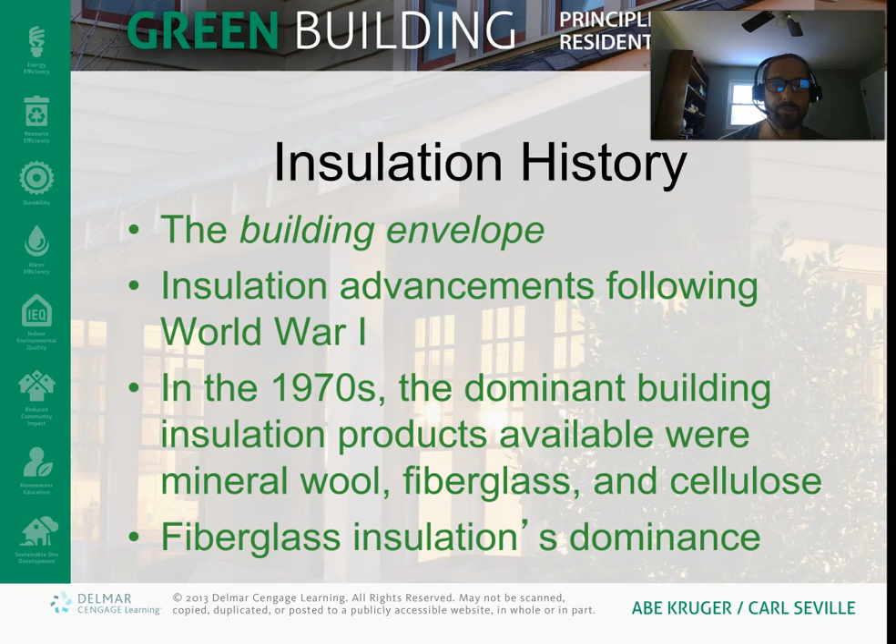Older homes are going to have primarily fiberglass batt, and a lot of modern homes as well. It's really inexpensive and easy to install. But increasingly, spray foam is being used, especially for high efficiency buildings, because it's good for air sealing and for insulation. So they're headed in that direction for high performance buildings.

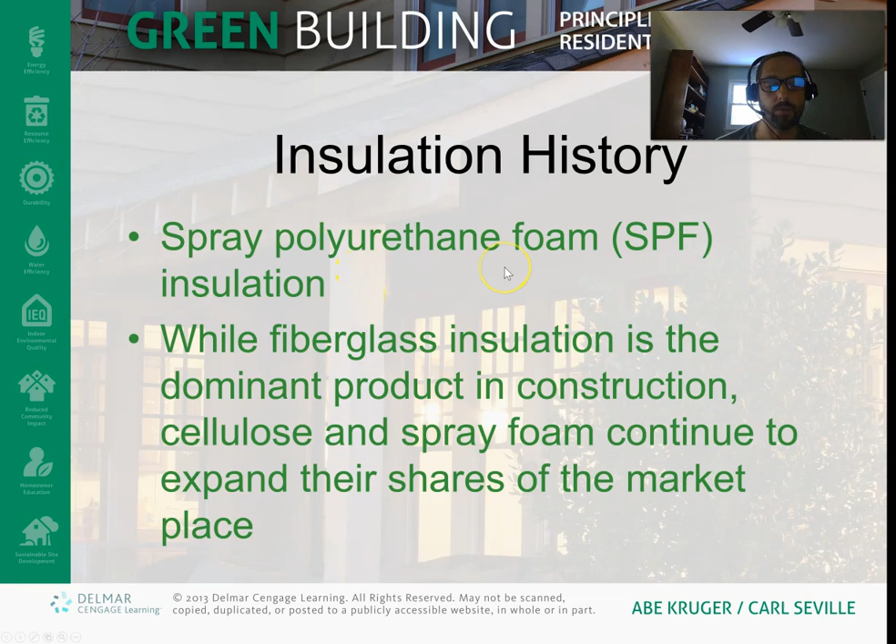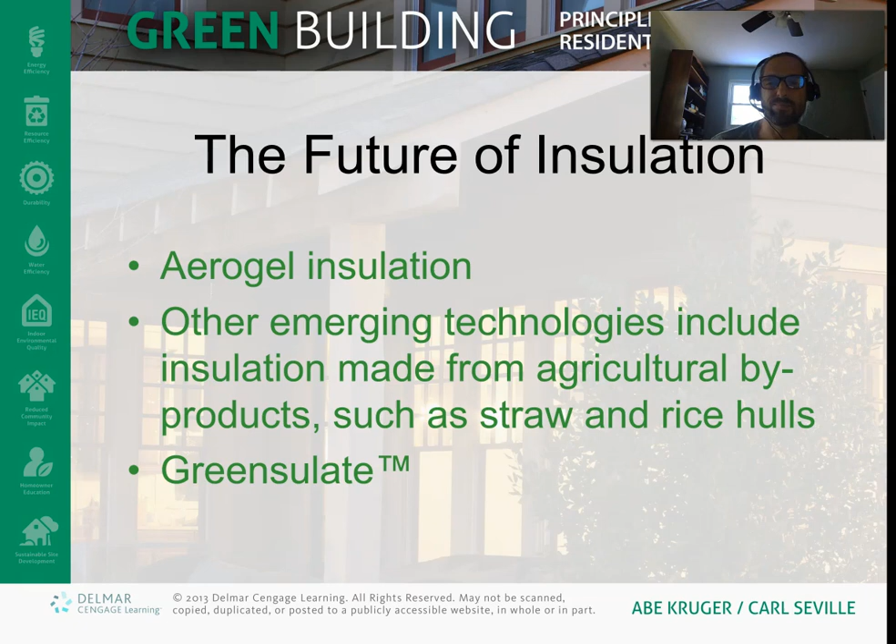There's emerging technologies in the building construction field, like structural insulated panels, which are relatively new, and aerogel insulation. So this is something that is always evolving.

When you decide which type of insulation to use, you want to think about its performance, so basically the R value, if it has any air sealing value as well. How long is it going to last? And of course how much it's going to cost, and the quality of the insulation.

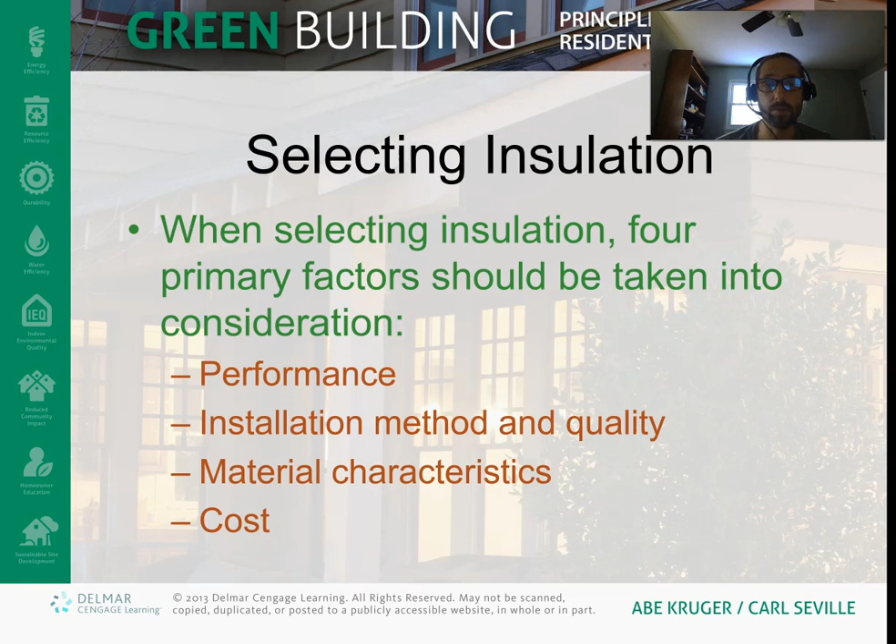There's different variables for each of these, like fiberglass batts are really cheap. Their performance is okay, they don't do any air sealing, but they do tend to last a long time. Whereas spray foam is rather expensive, but it has high R value per inch and really good air sealing. So you've got to do the cost-benefit analysis.

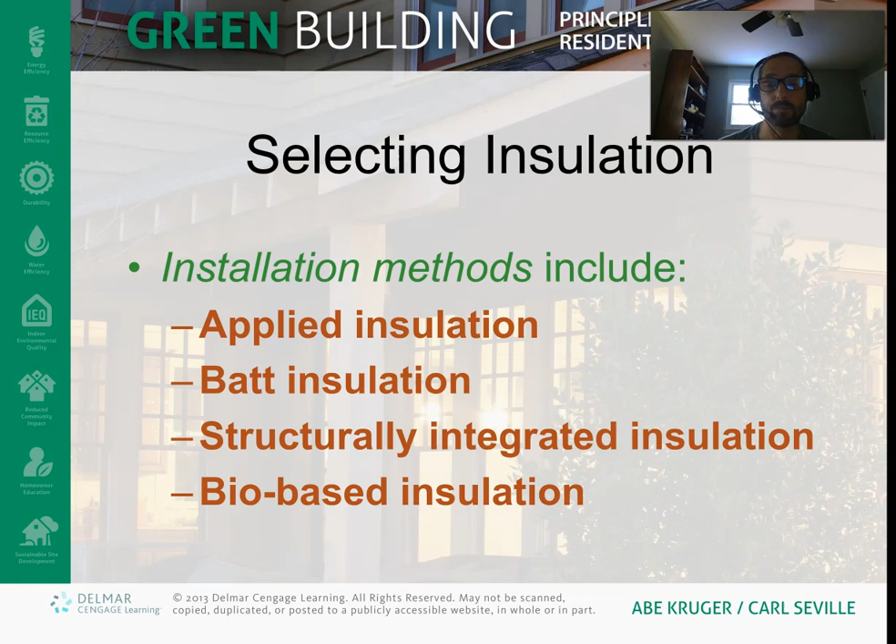There's the structurally integrated insulation we've talked about before, with structural insulated panels and insulated concrete forms. You can also do some bio-based insulation like straw bales.

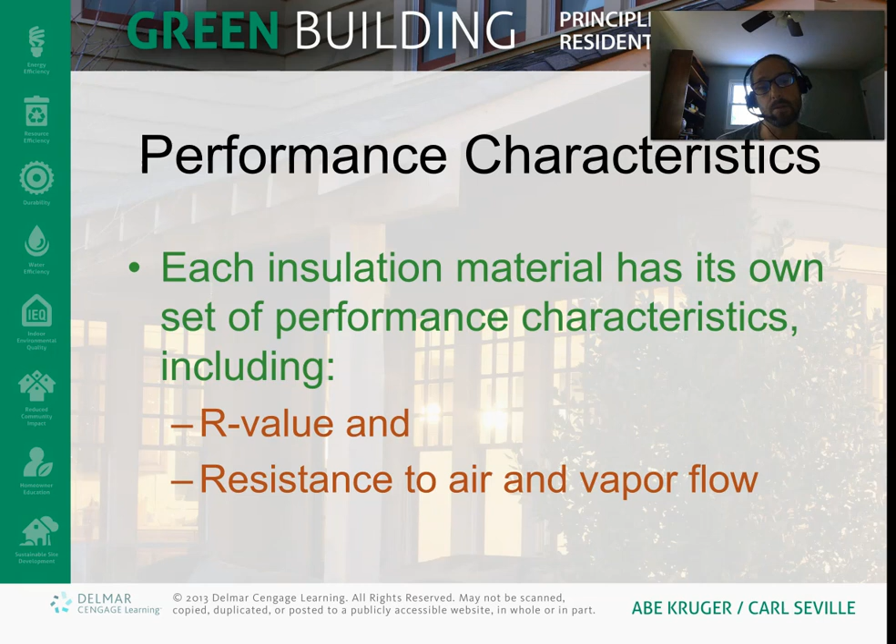Again, you want to look at R value, but also vapor resistance is an important aspect, because moisture control is essential in a building, and some materials are good at moisture control, some aren't, and you have to make that consideration as well.

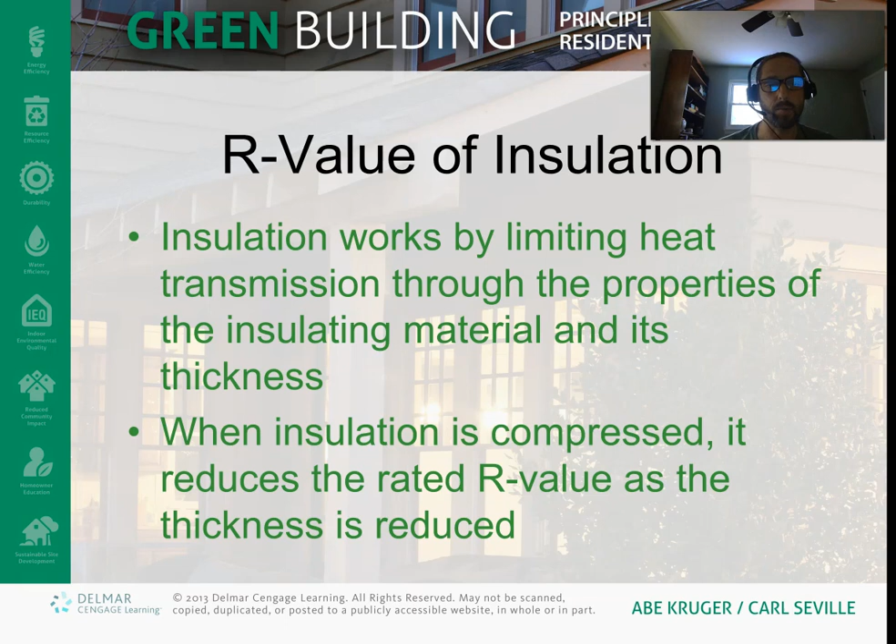I'll discuss this further - there's actually a video posted in a PowerPoint. Also, I discuss how insulation works, and it basically prevents heat flow, not necessarily airflow. Air permeability, on the other hand, is different than insulation.

You can have something that's a good insulator, like a fiberglass batt or blown-in cellulose, that's not a good air barrier, so it's very permeable in terms of air and moisture, but not necessarily in terms of heat. So you've got to really think about the difference between heat, moisture, and airflow. They're all related, but they're not the same thing.

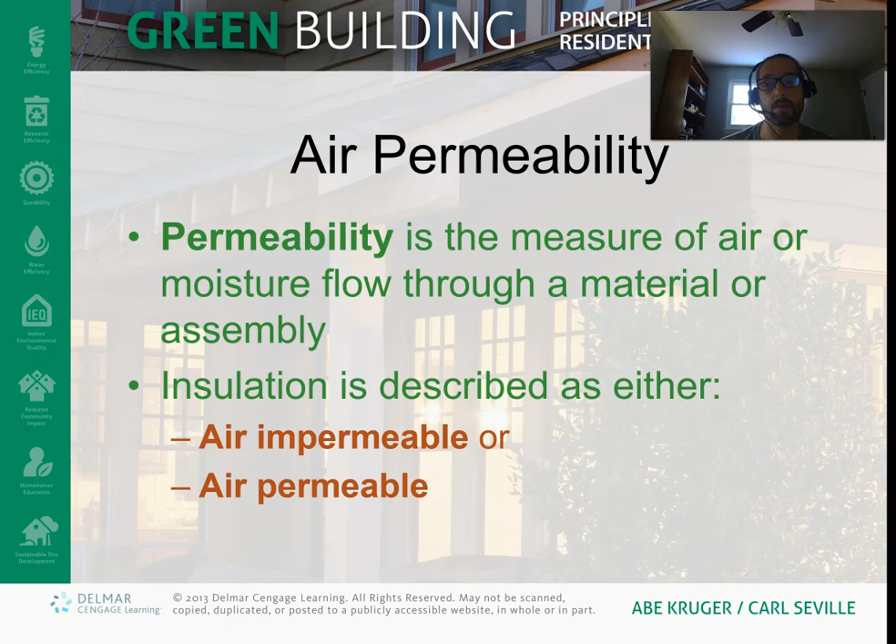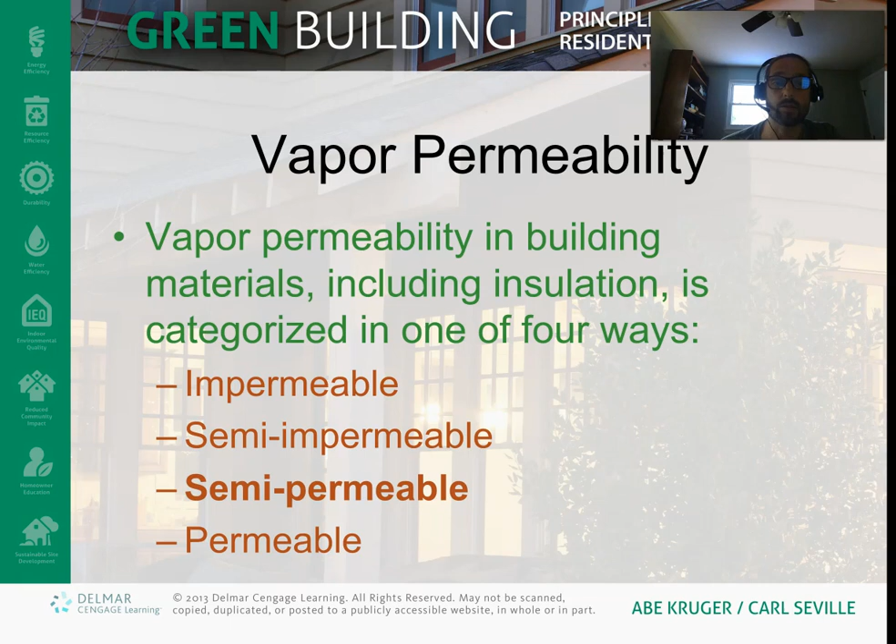You want to look at the permeability of different materials, so vapor permeability is an important consideration as well. Everything breathes a little bit, aside from solid metal. Wood breathes, concrete breathes, and even drywall around you actually breathes as well. But drywall is considered either semi-impermeable or impermeable, depending on the type of paint it has on it. Vapor diffuses through most surfaces, and you have to make that consideration when you look at your building envelope in a house, because moisture control is really important.

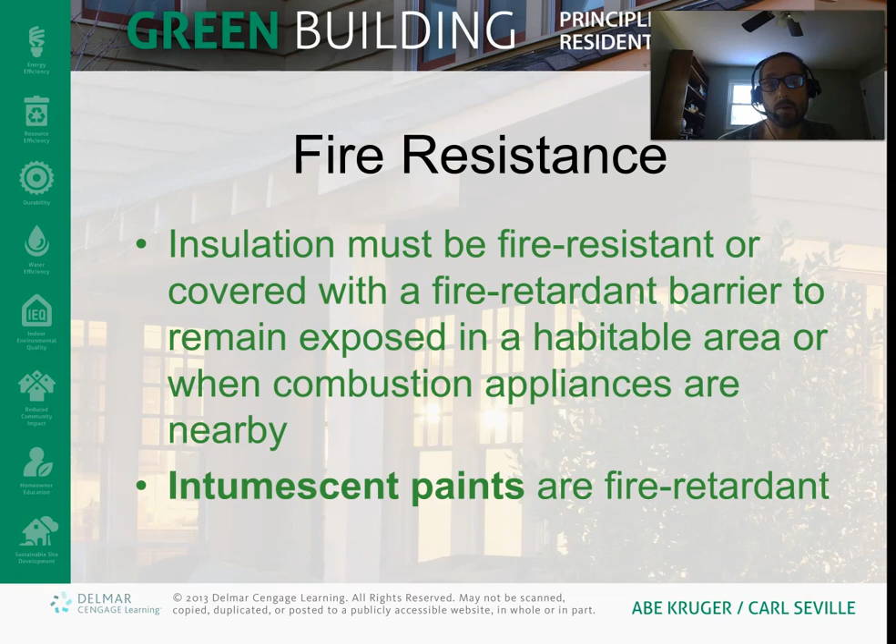Fire resistance is another one. Insulation has to be fire resistant, so when you have fiberglass batts, it's fiberglass, so it's not flammable. Whereas blown-in cellulose, which is really just chopped up wood fibers, they have to add a chemical to it so it's fire resistant. And there's certain paints that are fire resistant as well.

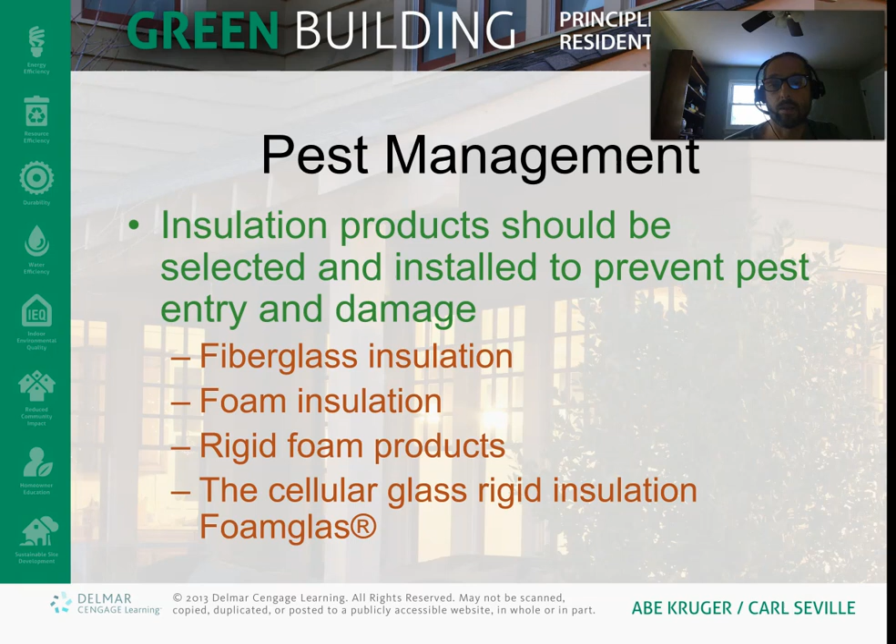You have to consider pest management. A lot of insulation is infused with some pest management products like borate. That's a consideration because these materials often border unconditioned spaces, which could be a crawl space or a basement, and you want to keep the pests away. Pests can be really detrimental to a building.

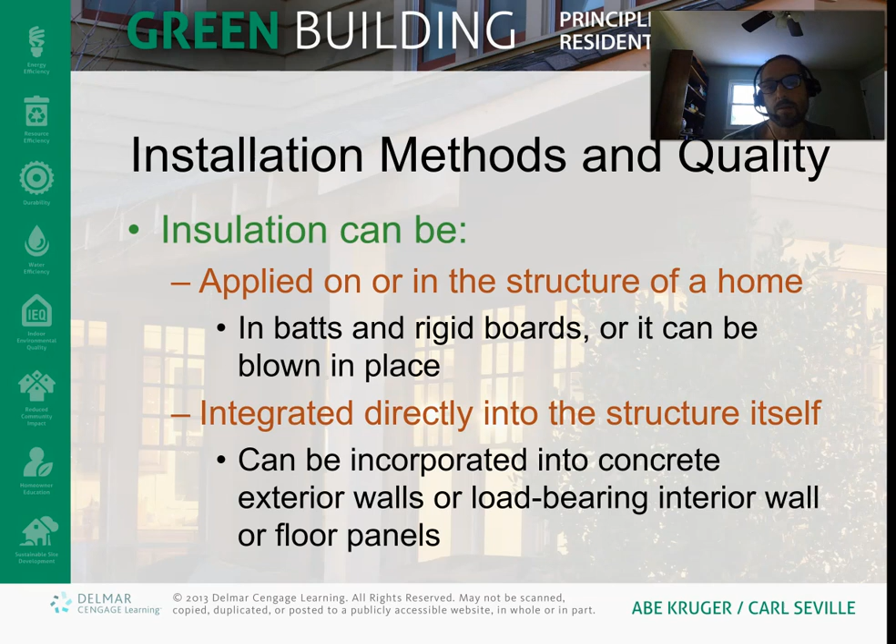There's all kinds of different ways you can apply insulation. You can blow it in, and there's actually some videos posted this week that show you some of the different methods. Some of them are structural, some are boards, like the blue board or the pink board, or polyisocyanurate. So there's all kinds of different ones.

Batt insulation is the least expensive one, the easiest one to install most of the time - that's the big rolls of fiberglass. There's pros and cons: it's relatively cheap and a decent insulator, but it's also not an air barrier, and it's not easy to install in every application.

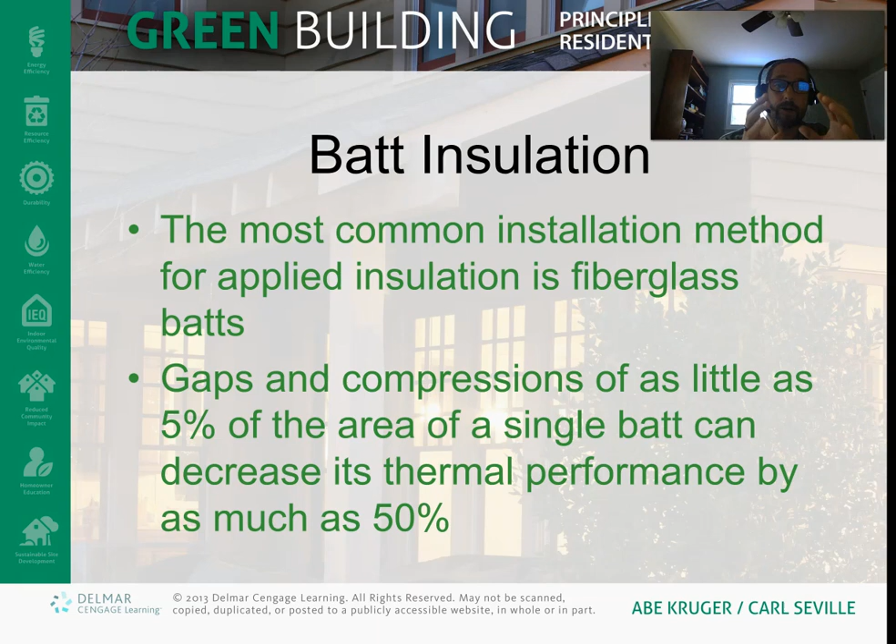I want to stress this bullet point: if you have perfectly good insulation in a ceiling or a wall, and you're missing a spot that's only 5% of that surface, it can actually drop your total thermal performance by up to 50%.

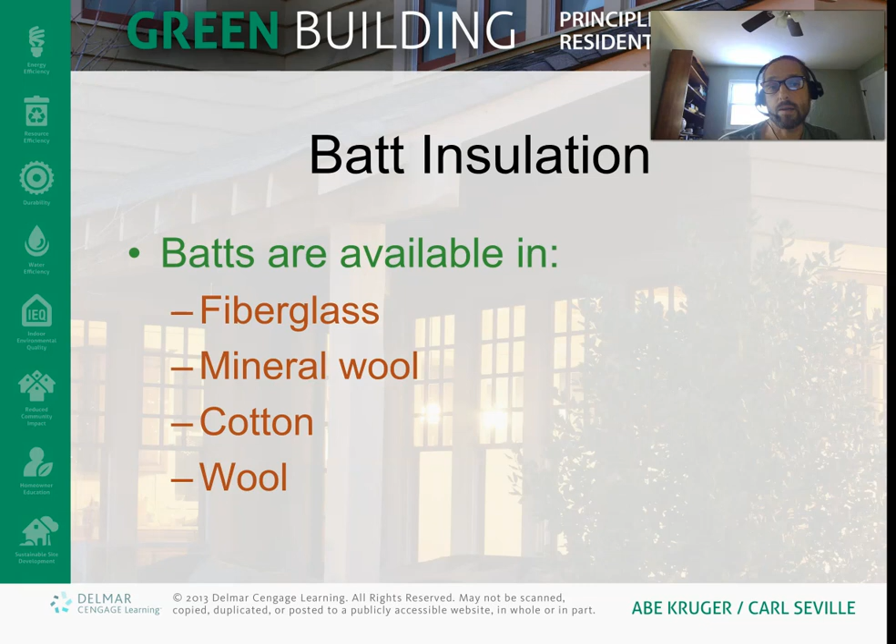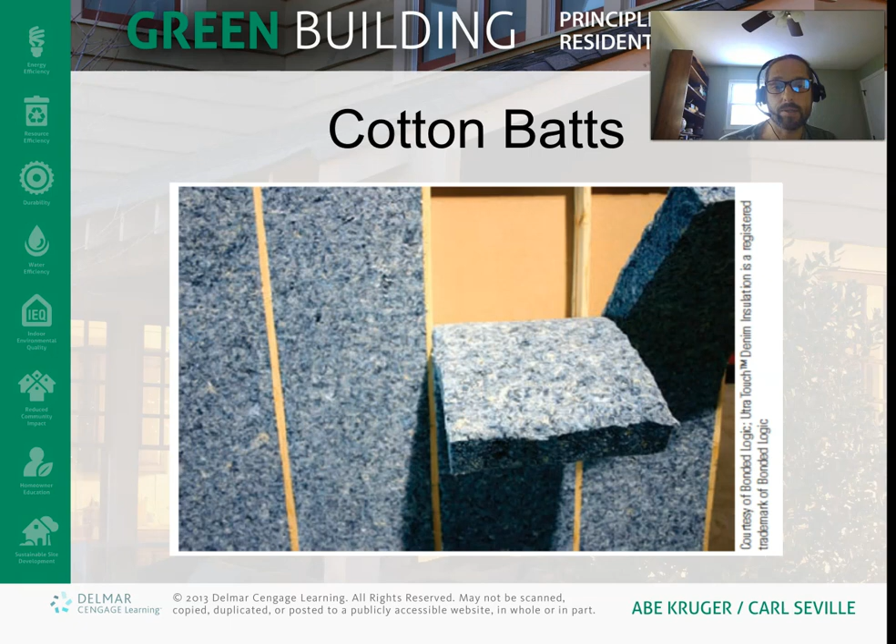There's different types of batt insulation. The most common is fiberglass, although mineral wool is used sometimes as well. Fiberglass batt, I think everyone knows what that is. You can do cotton batts - this is kind of an older insulation, not used as much. Wool is a nice natural material, but again, not super common.

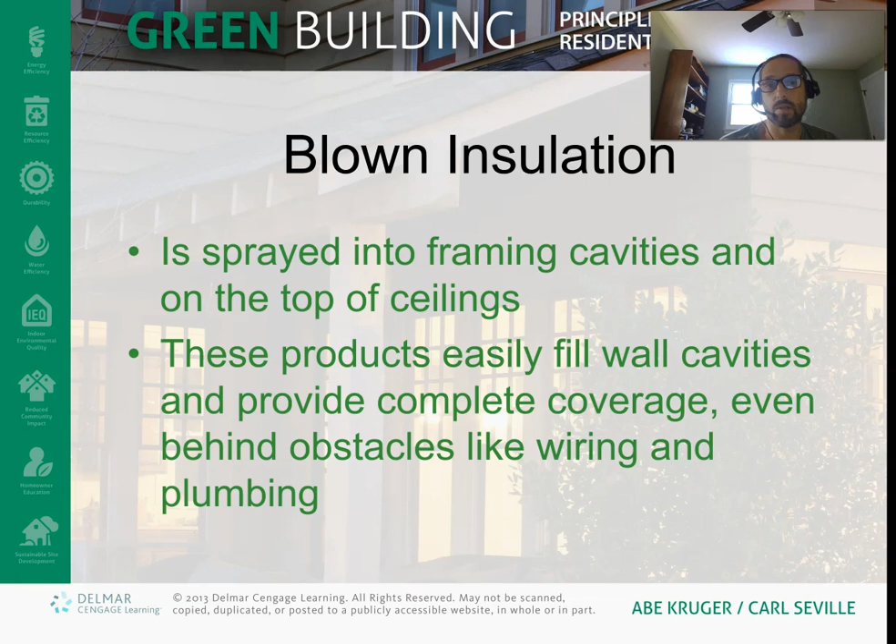Blown-in insulation is nice because you can just fill in cavities, and there's a couple different methods of this. You can do it inside the wall, something called dense packing, or you can just blow it in, what's called loose fill, in ceilings. So you get fiberglass and cellulose - those are your two most common.

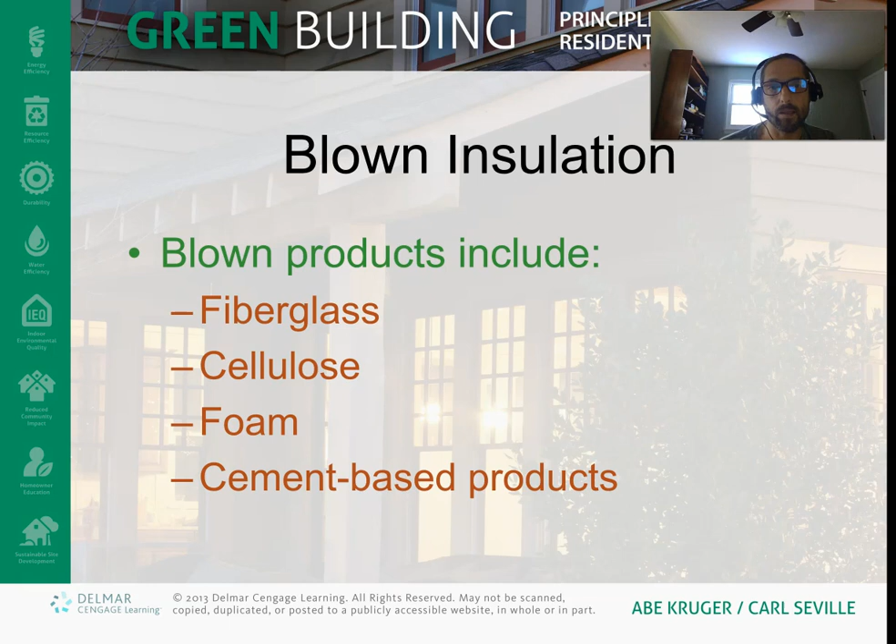Cement-based, they don't really use that often. Foam you can use, but it's not as common. There's your blown-in fiberglass.

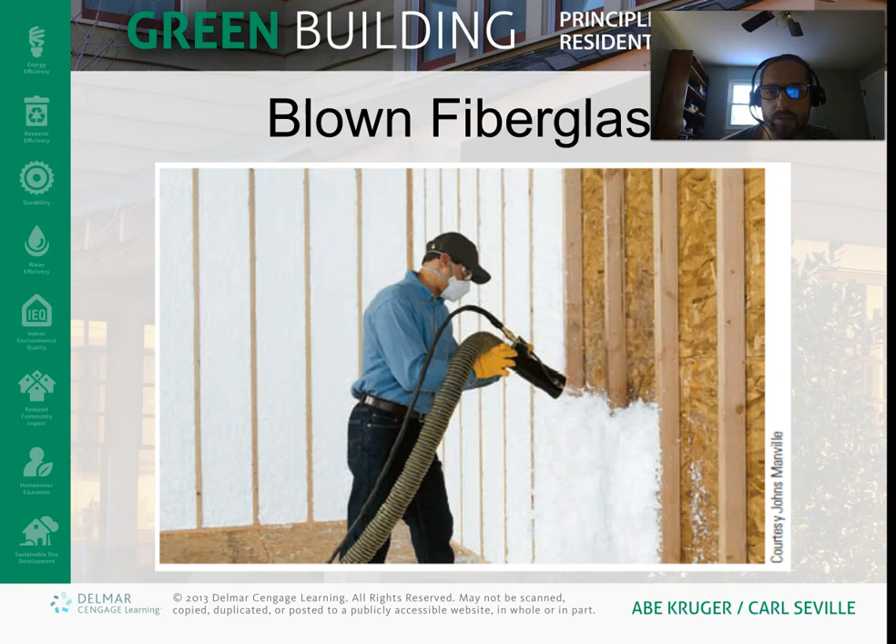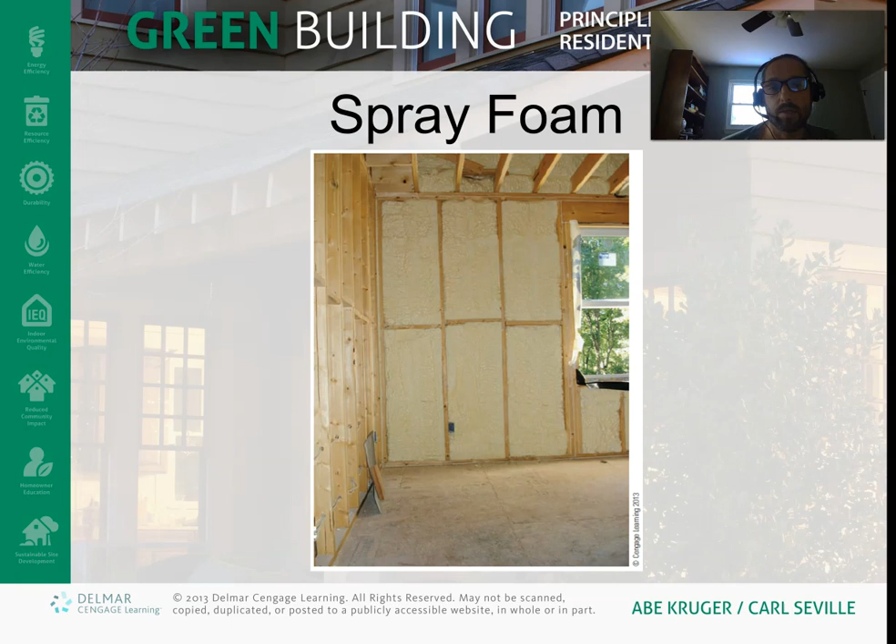This is spray foam. This is a really good air barrier and also has a good insulating value. This is used in high performance homes - you're going to have spray foam like this, and I posted a video this week on two-part foam. Cement based is something that's not very common, but you will see it out there.

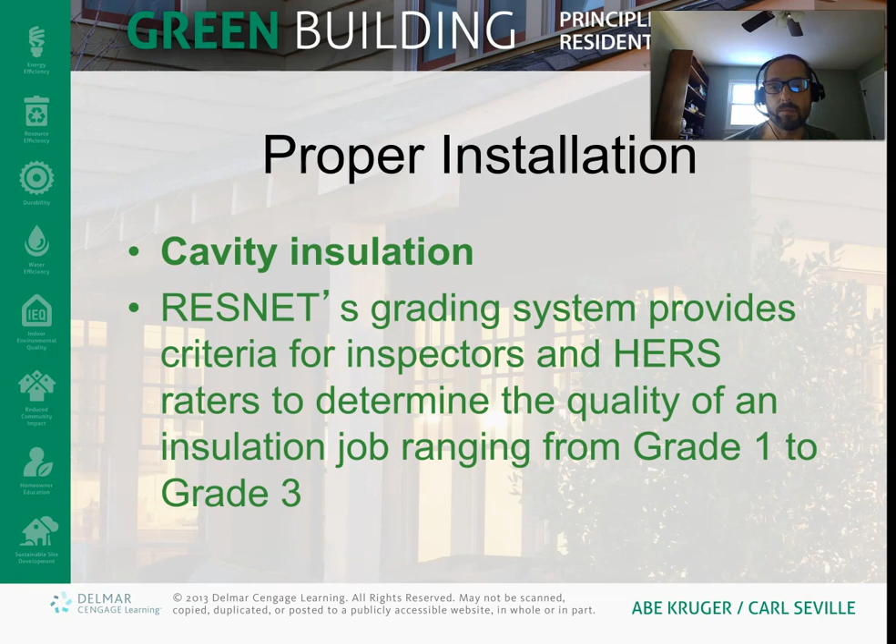You do need to have proper installation, and there are some standards for that, including with RESNET and HERS rating, which we went over in Chapter 1.

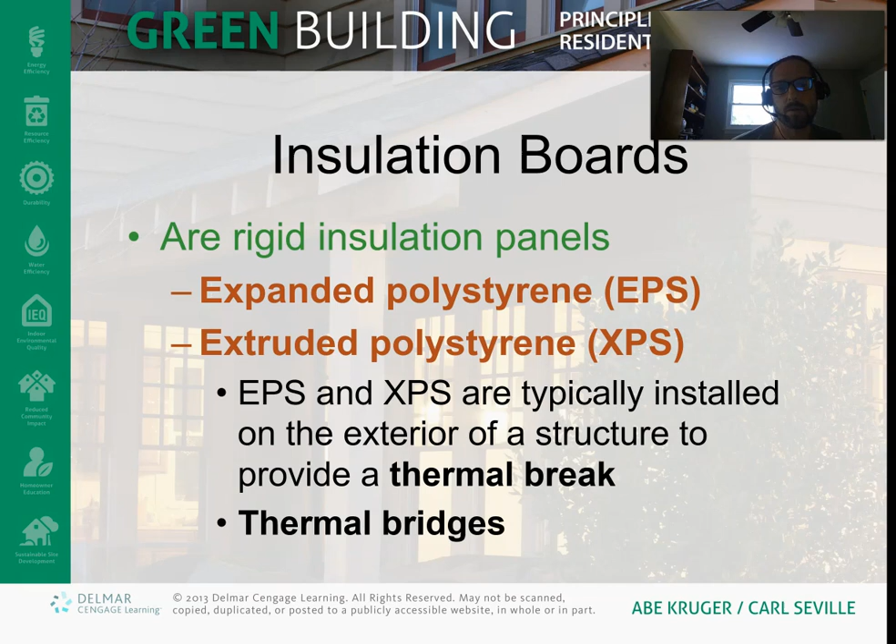Insulating boards - EPS and XPS are pretty common, especially the XPS. If you've ever seen a blue board or a pink board at a hardware store or in a basement, they are used, especially the XPS. That's your blue board and pink board. It's good because it's moisture resistant. You can use it in damp areas like a basement, or it's good for foundation walls. It has a really high R value per inch, and also does some air sealing and water sealing as well.

Then we've got structural insulation, like ICFs and SIPs, and straw bale. Straw bale is not very common, but ICFs are used a lot in commercial construction in particular - we've gone over that before. Structural insulated panels are a little bit of a niche application, but it is done out there.

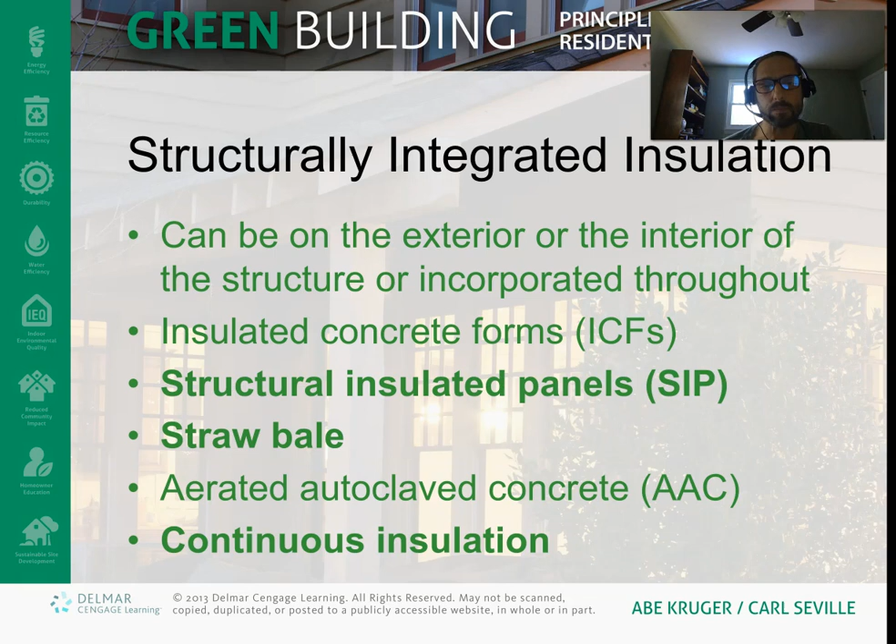In terms of the impact of materials, you want to look at the life cycle assessment. There's a lot of focus on green building in this course, and you really want to think about all of the life cycle impacts of everything you use, including: is it a natural material, is it recycled material, can you recycle it when it's done, are there toxic chemicals in it, and where was it manufactured. Like straw bale, you can do that locally. For example, if you have a cob wall, you can build that locally too. But you want to think about all of the life cycle costs of it as well.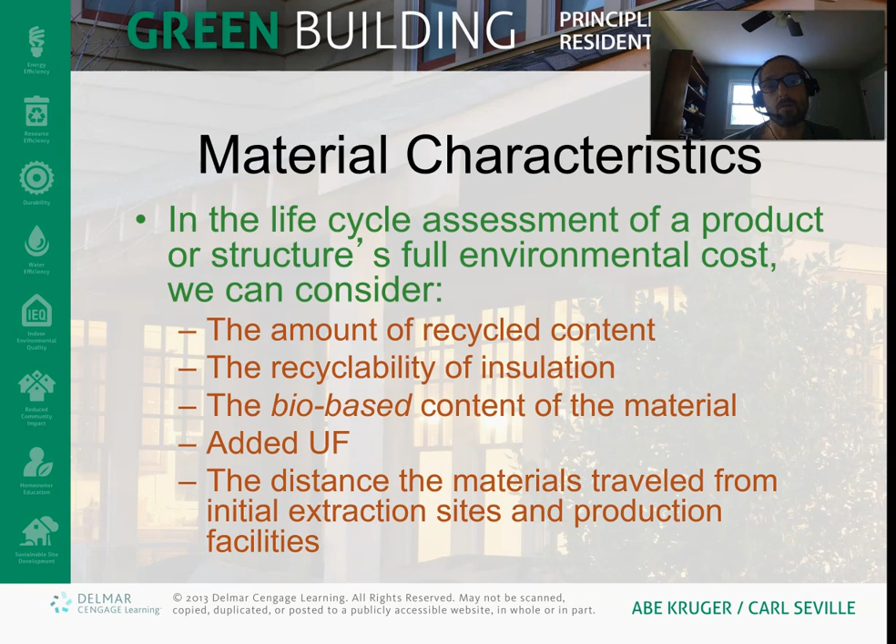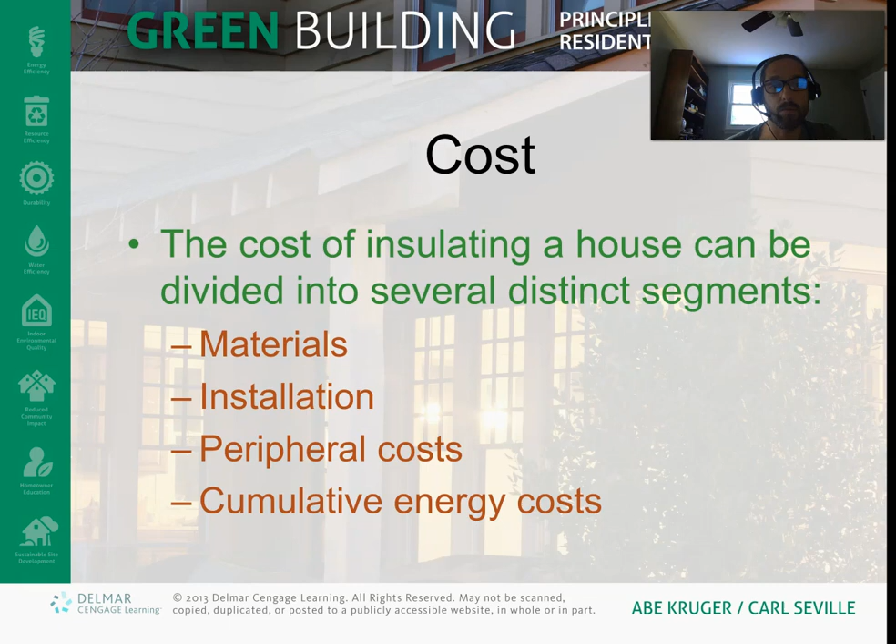When you're calculating the actual economic cost, the direct economic cost, you want to look at things like the materials, how long it takes, how easy it is to install, and other costs like how difficult it is to get, and you want to look at the cumulative energy cost. When building a green or efficient building, you want to look at the life cycle cost. You may pay more upfront for a structural insulated panel, or advanced framing with extra insulation, but in the long term, you're going to save on energy costs. So you need to do a robust calculation to figure out the true benefit of these measures.

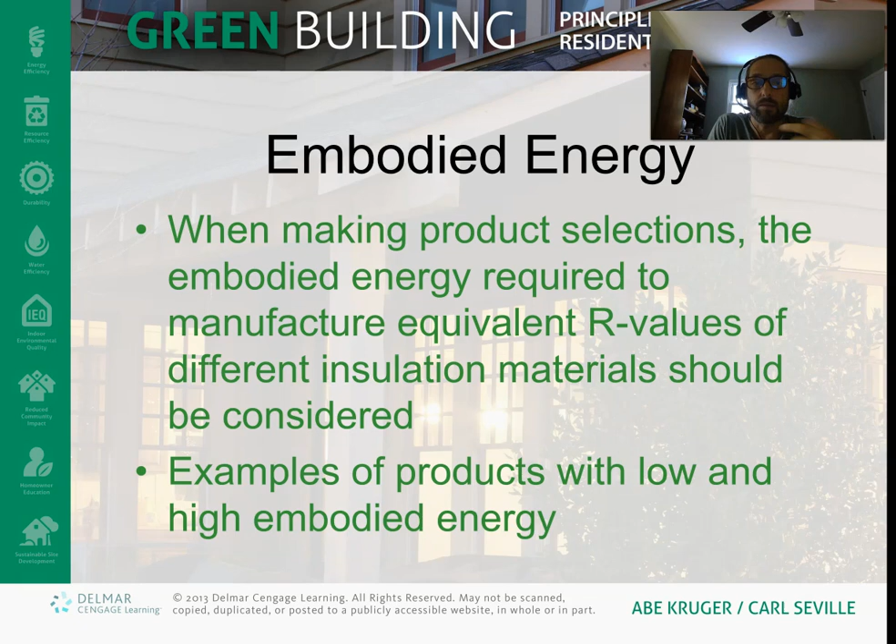When we look at the energy, it's important to look at the embodied energy - how much energy it takes to manufacture the product, how much it takes to ship, and so forth.

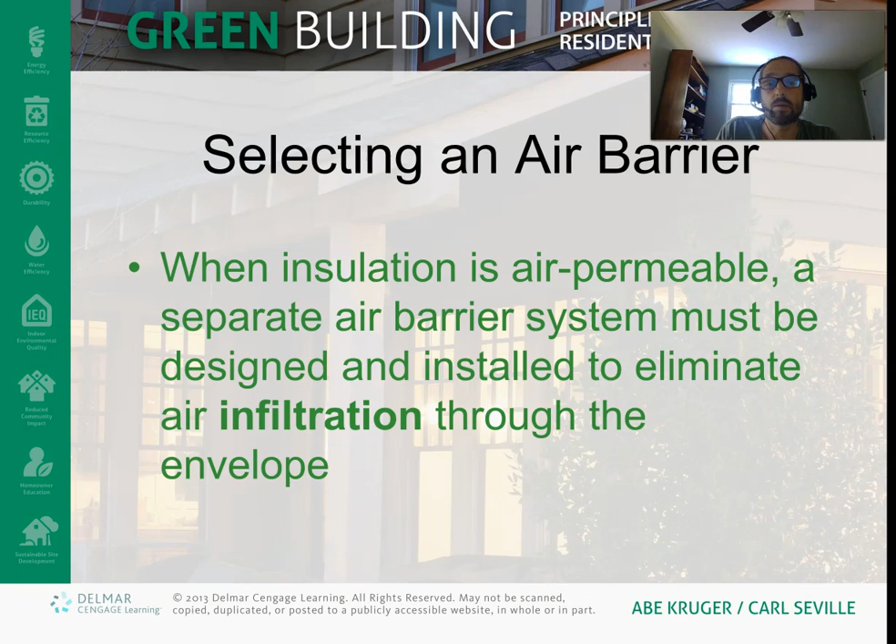An air barrier is something that prevents airflow. Some insulation does provide an air barrier, but most of it does not. Really just foam is the big one that provides air barriers, whereas pretty much all of the others do not.

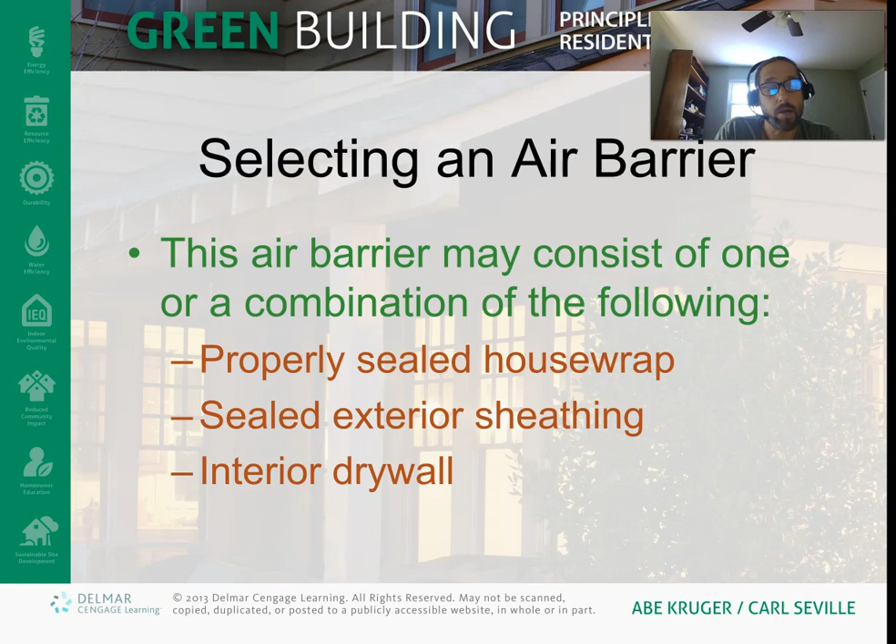There's different ways to install an air barrier, like a house wrap. We talked about zip panels - that helps form an air barrier. If you've ever seen the Tyvek wrap around a house, that helps form an air barrier as well. But also just air sealing is really important. Drywall is a good air barrier - put a couple coats of paint on it especially, and it's a really solid air barrier. So there's your house wrap that I talked about, like the Tyvek.

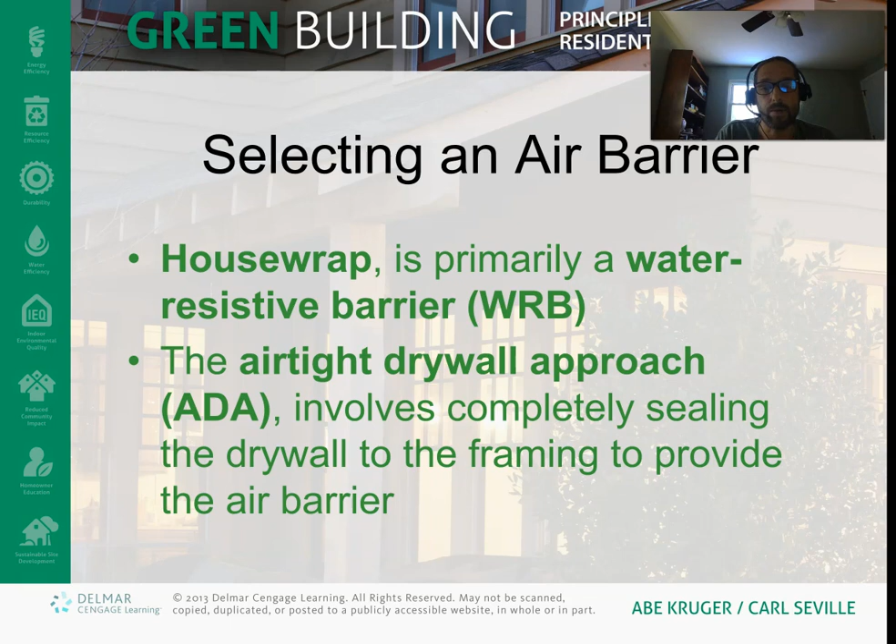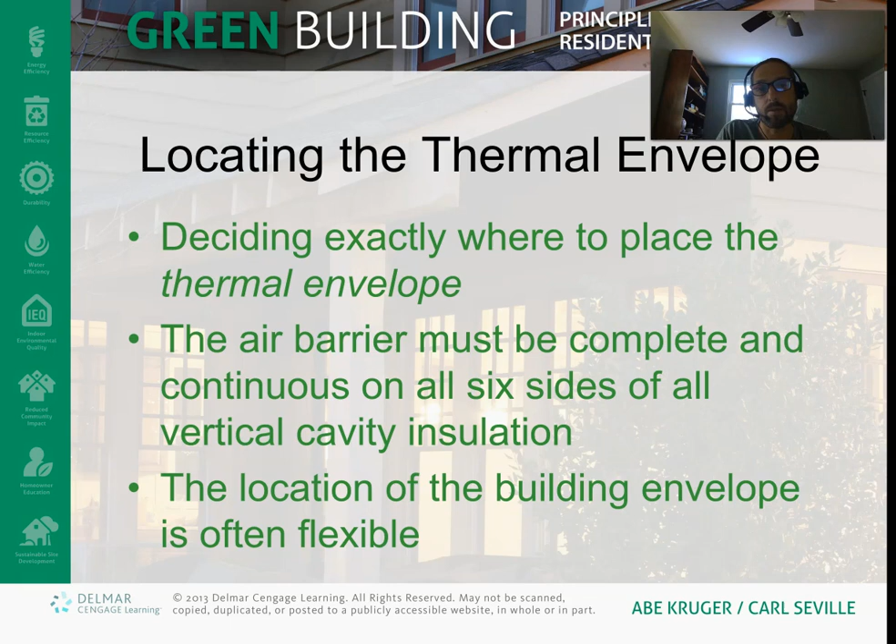A thermal envelope is the same thing as the building envelope, and that separates the conditioned from the unconditioned space. The thermal envelope - you can sort of manipulate this a little bit, but it's basically where the insulation is. You want to have the insulation and the air barrier continuous and in contact with each other. All 6 sides of the building should have a fully continuous air barrier and a fully continuous thermal barrier as well, so that way you don't have any leaks, and it maximizes your efficiency.

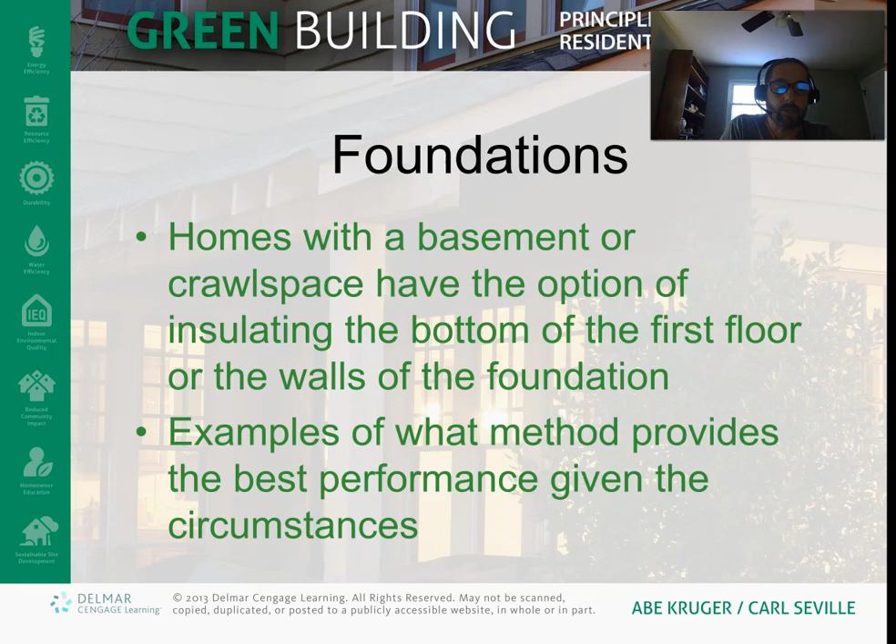Foundations can be a little bit tricky. Sometimes you want to bring the foundation, the basement, within the thermal boundary, and sometimes you want to leave it outside. It just depends, and there are different ways to manipulate that.

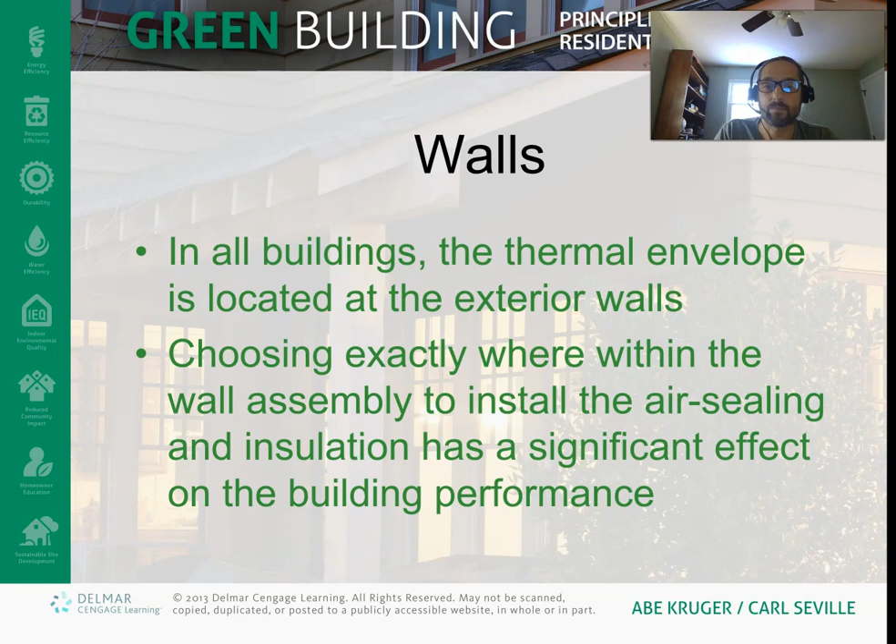Walls are a really important part of the thermal envelope. They have to be nice, tightly sealed, well insulated. Try to eliminate all thermal breaks, all thermal bridges. Ceilings as well.

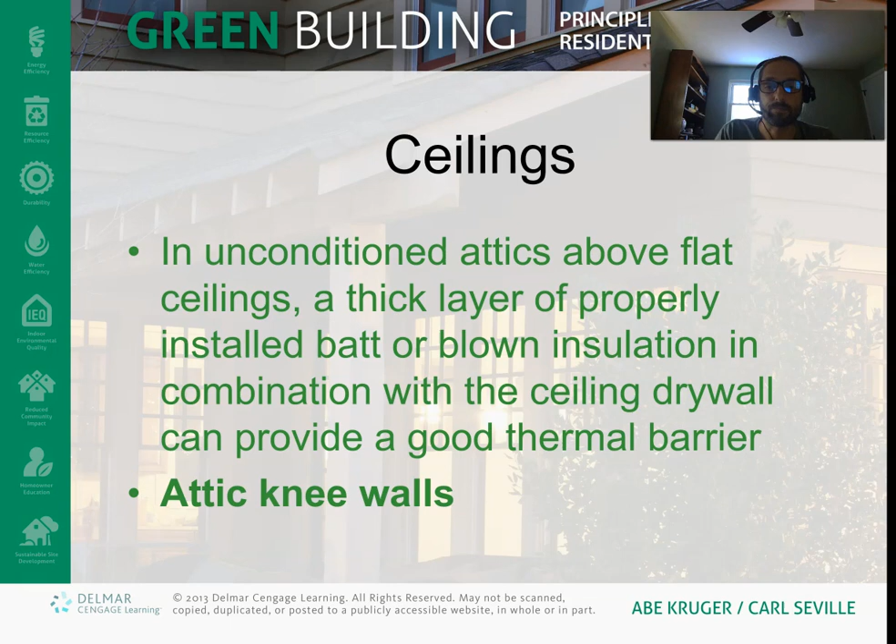And again, buildings need to have a completely air sealed and continuous thermal envelope as well.

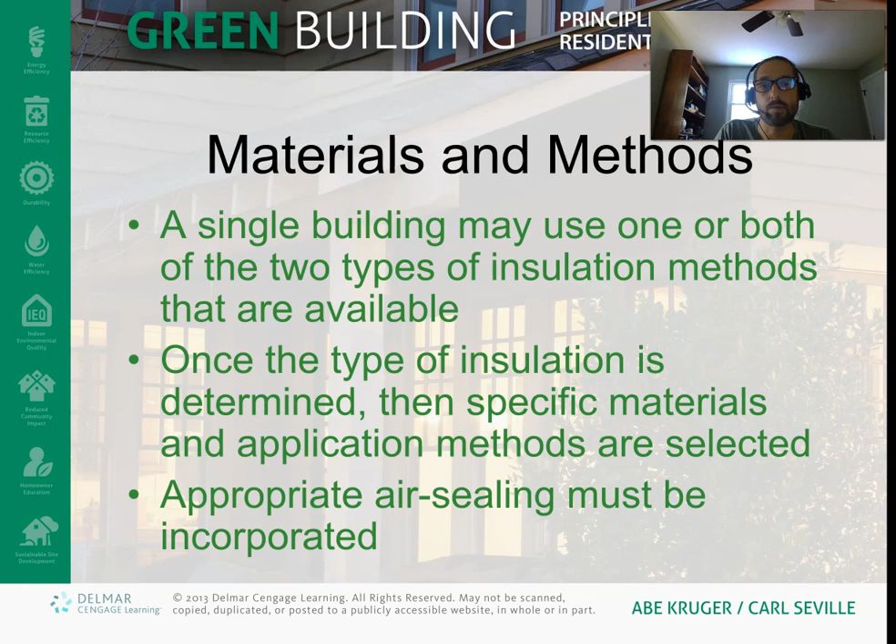There are different types of insulation you can apply. There's fiberglass batts, and there's something called facing. An unfaced batt doesn't have any of that paper. If you've seen the fiberglass roll that has paper on it, that's facing. What that does is provide a moisture barrier.

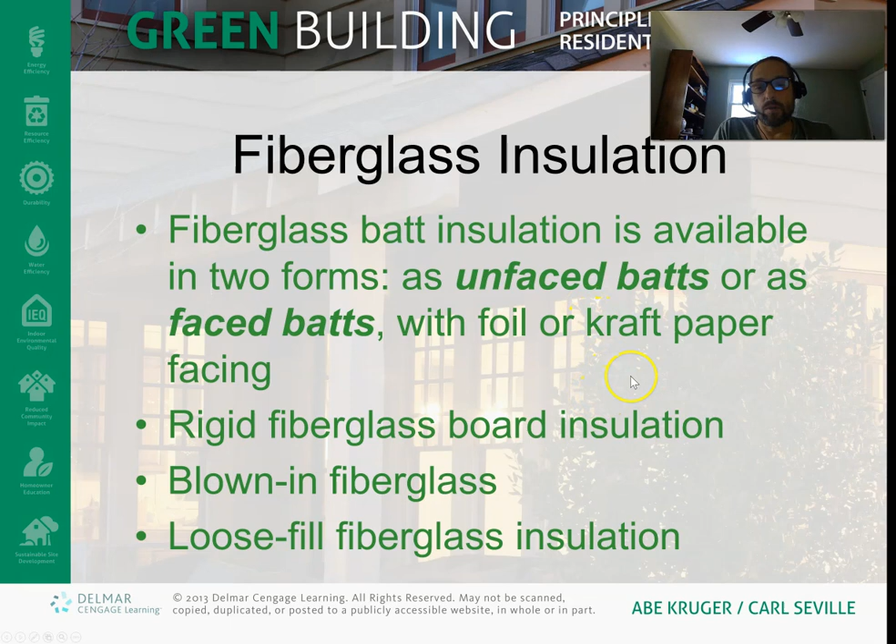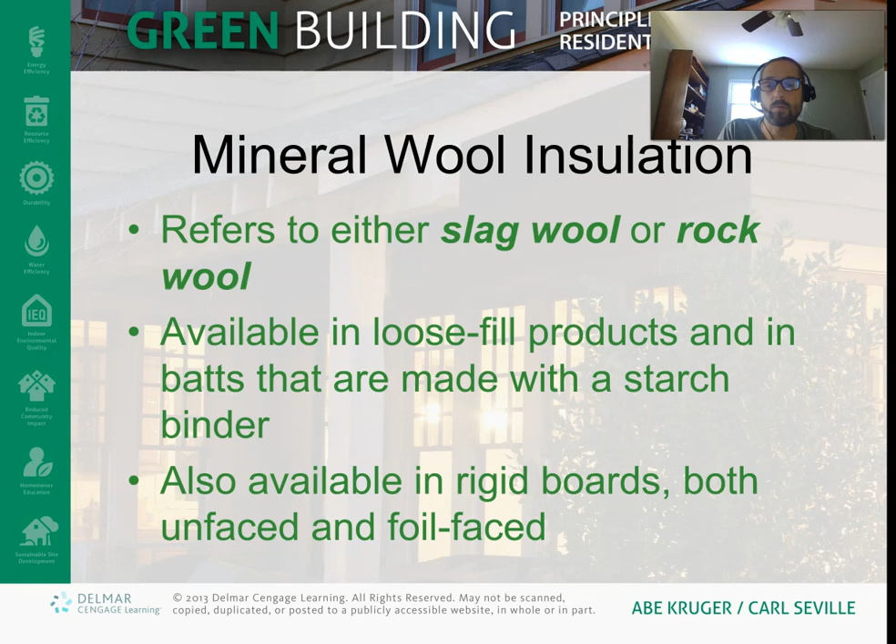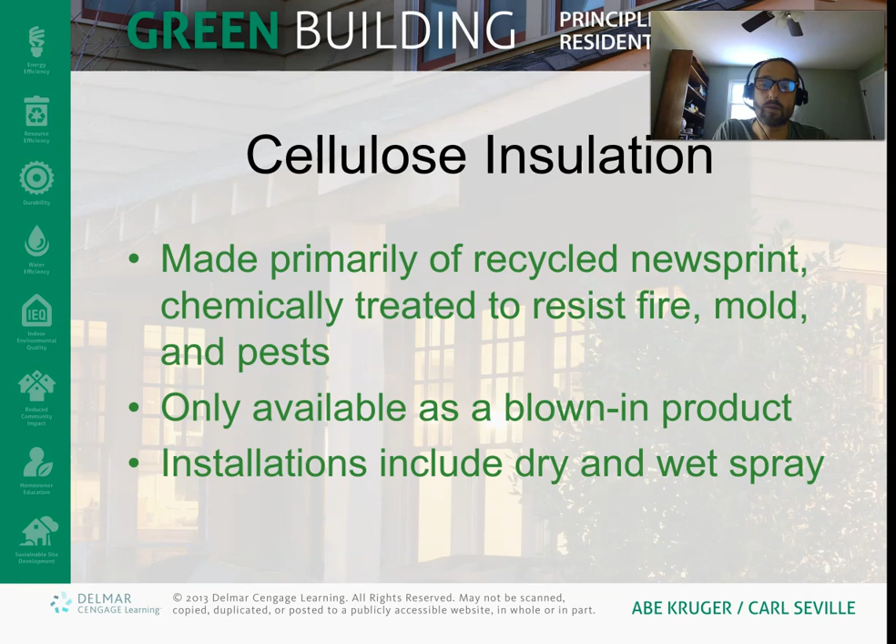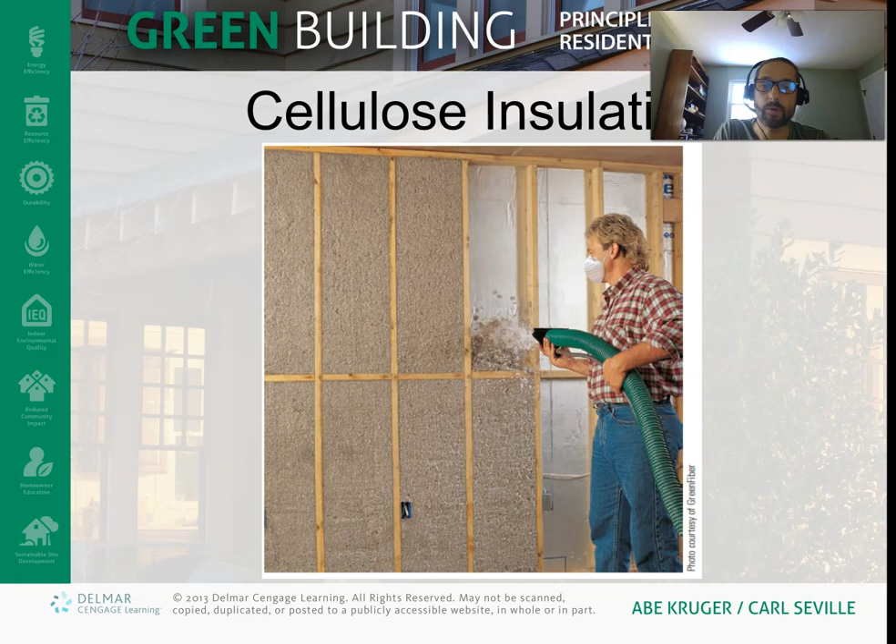There's blown-in fiberglass—I have a video on some of these in this week's lesson. You can do mineral wool as well. Cellulose is basically recycled newspaper, chemically treated so it's fire resistant and pest resistant. You can do this as a blown-in product. You wouldn't normally blow it into an open wall, but I guess you can do it that way. There's also a video on dense packing in this week's folder as well.

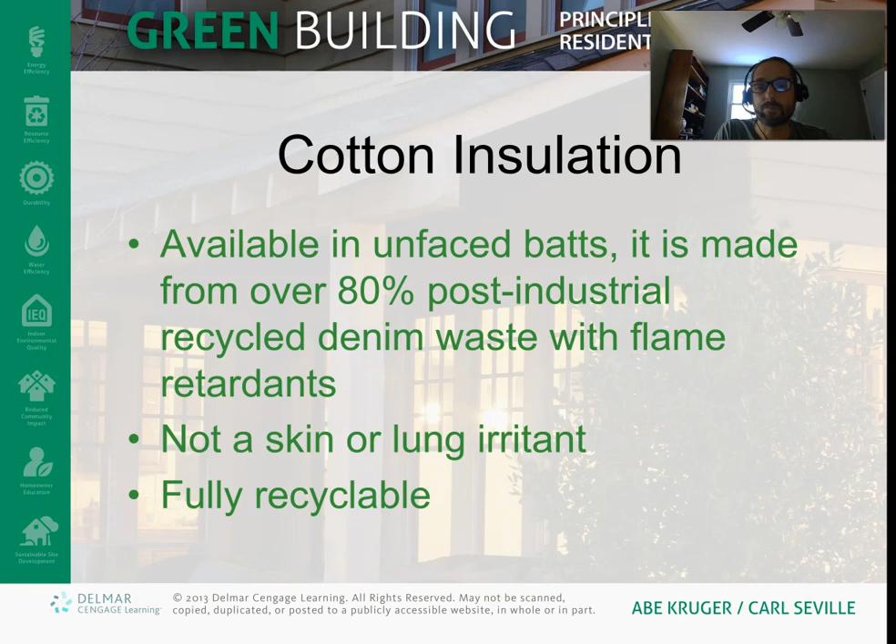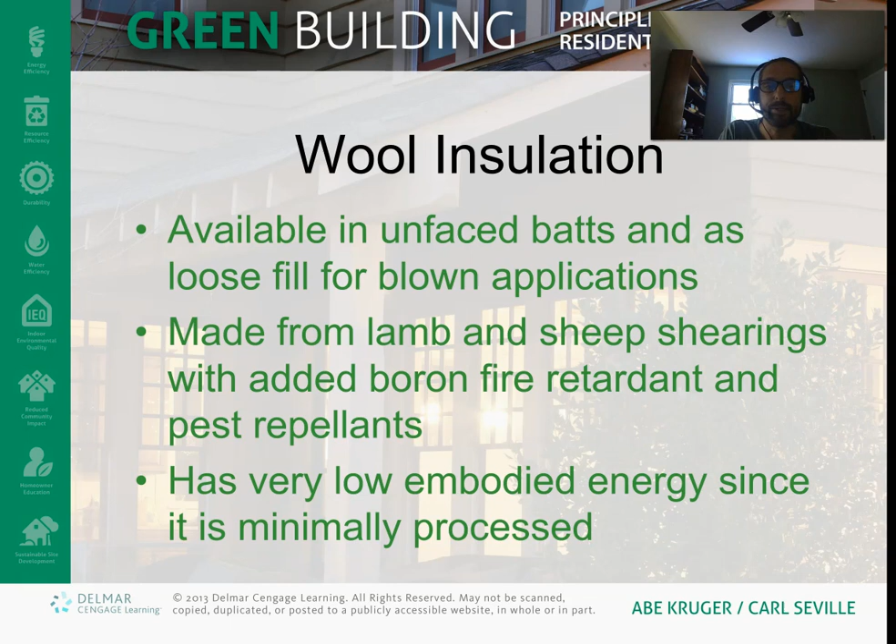Cotton is nice because it's a natural material, fully recyclable, and a lot of it is post-industrial. Wool is something that's very low embodied energy, a natural material, and it's naturally moisture and fire resistant.

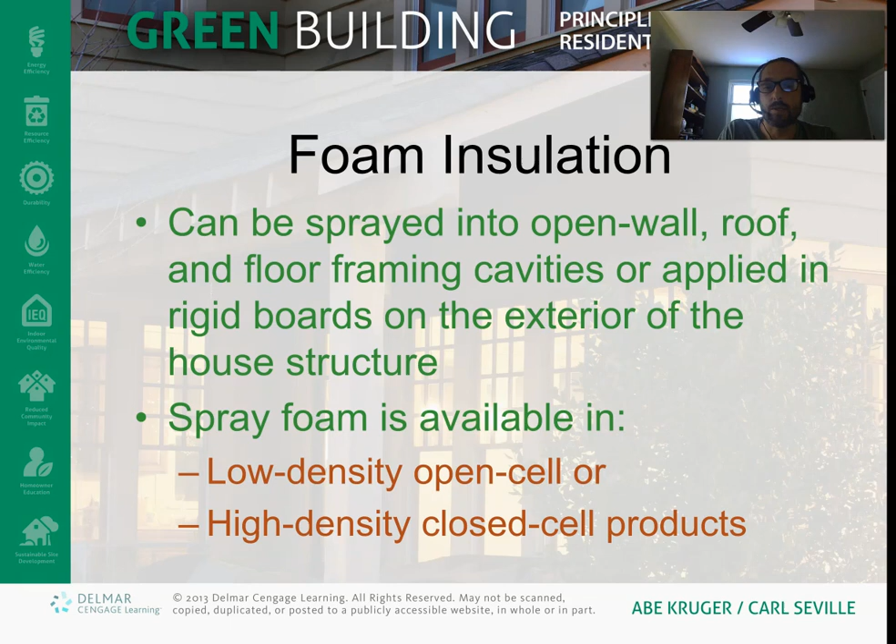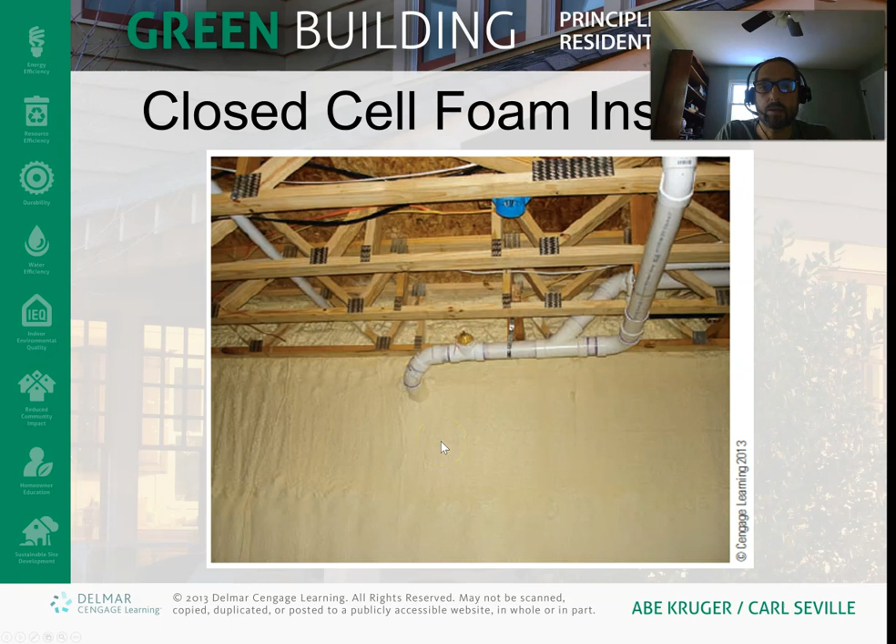There are different kinds of foam—low density and high density. Closed cell foam is the stuff you see here on the wall, good for something like on a foundation. Again, it has good moisture resistance, good air barrier, good insulator. There are different types of foam—you can get the 2-part foam or the little can of 1-part foam.

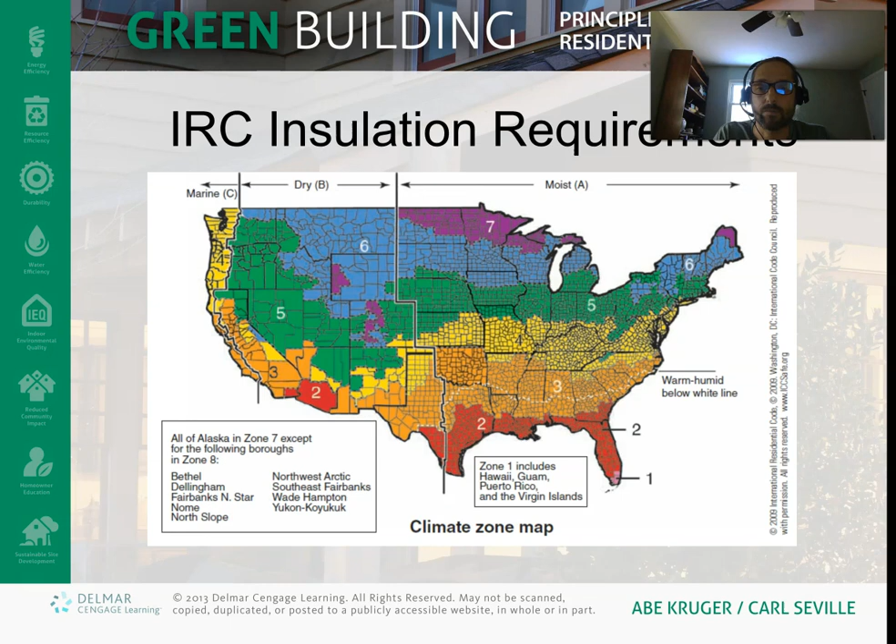When you're looking at how much insulation you should have in a building, this is the International Residential Code, which the Department of Energy actually has. This is in one of the videos this week as well, and it shows you the R values you should have in different areas of the country—the IRC International Residential Code requirements.

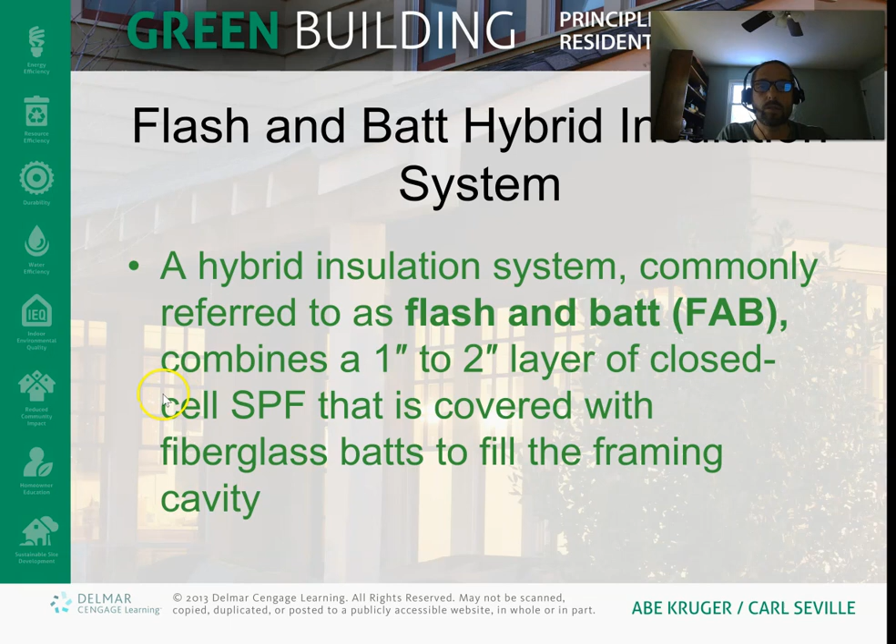There are some hybrid systems like Flash and Batt, where you do an inch or two of spray foam and then cover that with batt. That gives you the best of both worlds, because you have air sealing and good insulation, but it's less expensive than just doing spray foam, because that's pretty expensive.

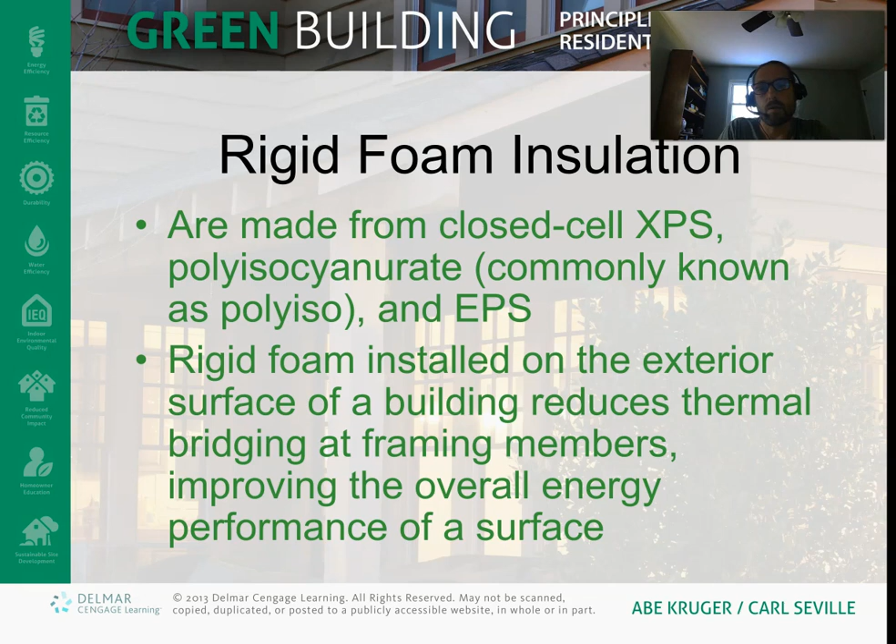Your rigid foam insulation—XPS is the most common one. Polyiso is another one that has the highest R value per inch. You can use rigid foam for any number of applications, and I go over a few of them this week.

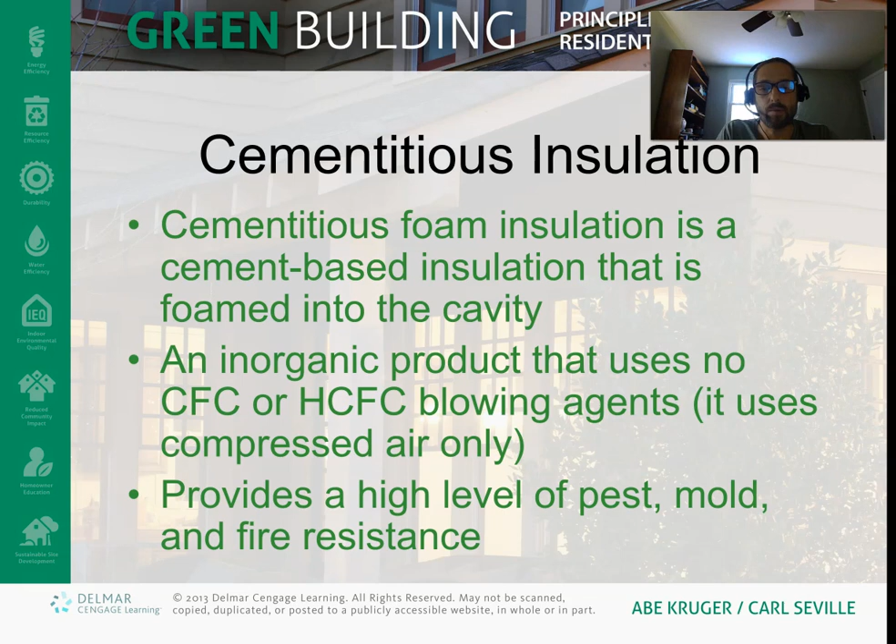Polyurethane foam is this 2-part foam—again, there's a video on that this week. Cementitious insulation is less common, but this is something that provides good pest, mold, and fire resistance.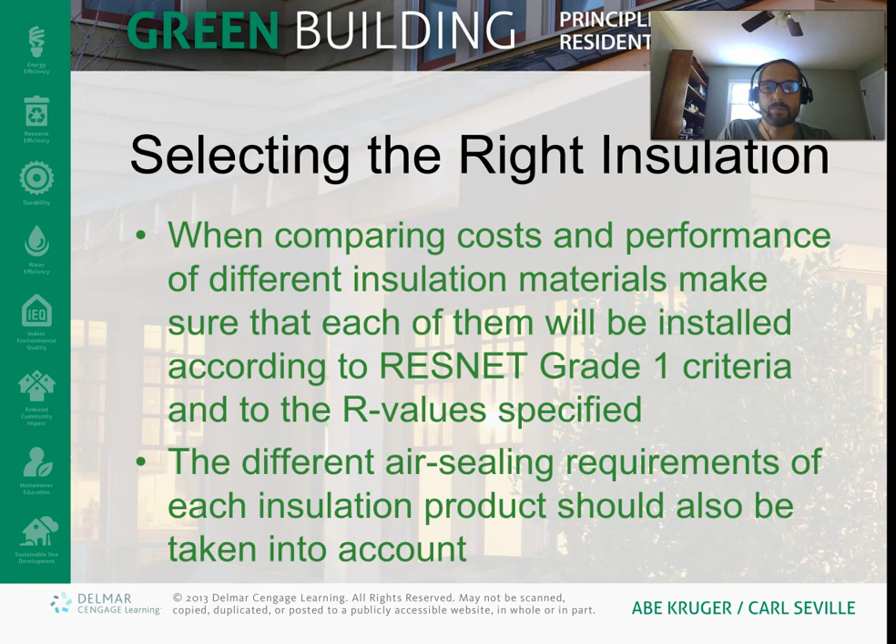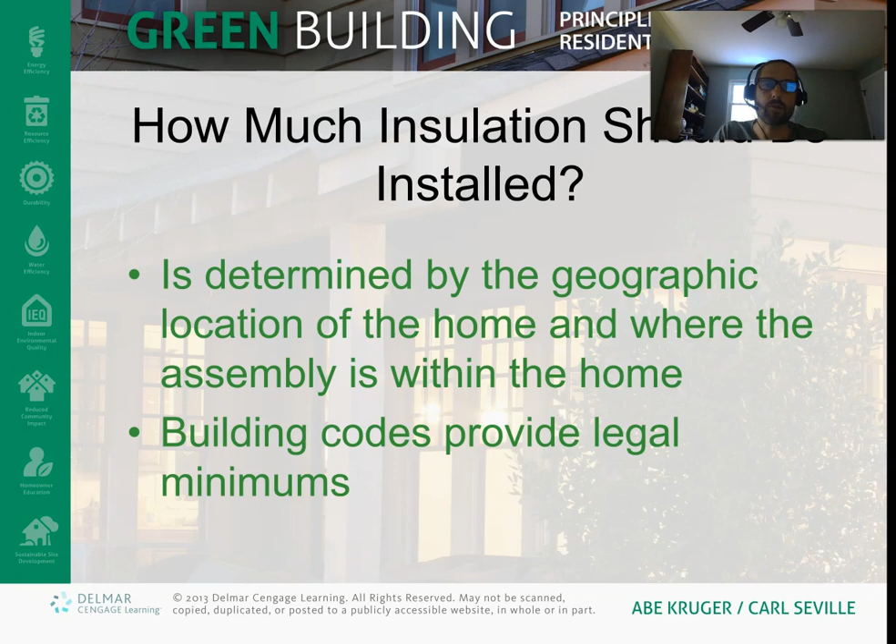There are insulation requirements and different standards. RESNET does a really good job of providing a cost-benefit analysis, and the Department of Energy gives you recommendations for how much insulation you should have in different climate zones.

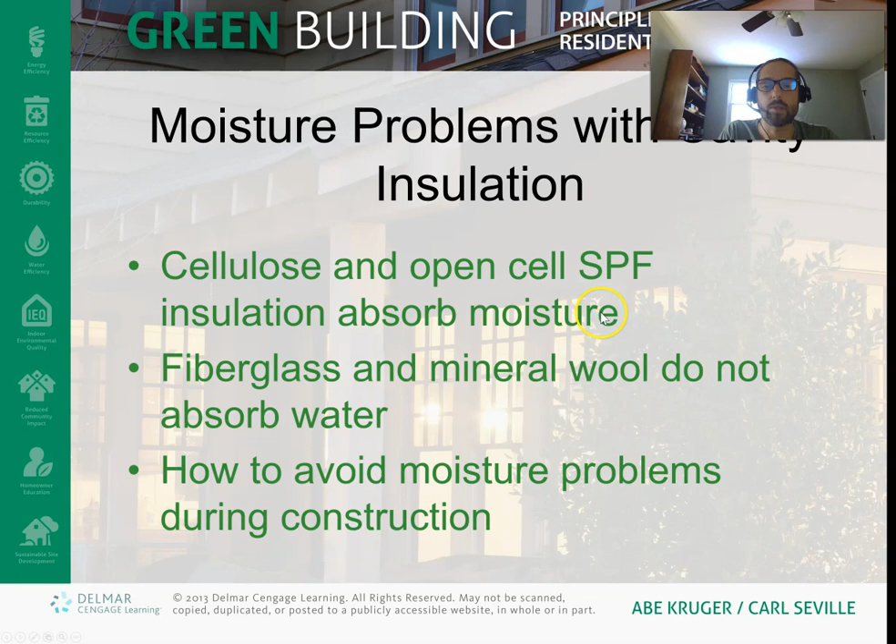You also have to be really careful about installing insulation, because you can cause moisture problems. For example, if you have fiberglass batts and on top of that you put a fiberglass batt that has facing—so you have something that allows moisture through it, and then on top of it something that doesn't allow moisture through—you can actually get moisture issues in that lower layer. You have to be really careful about that.

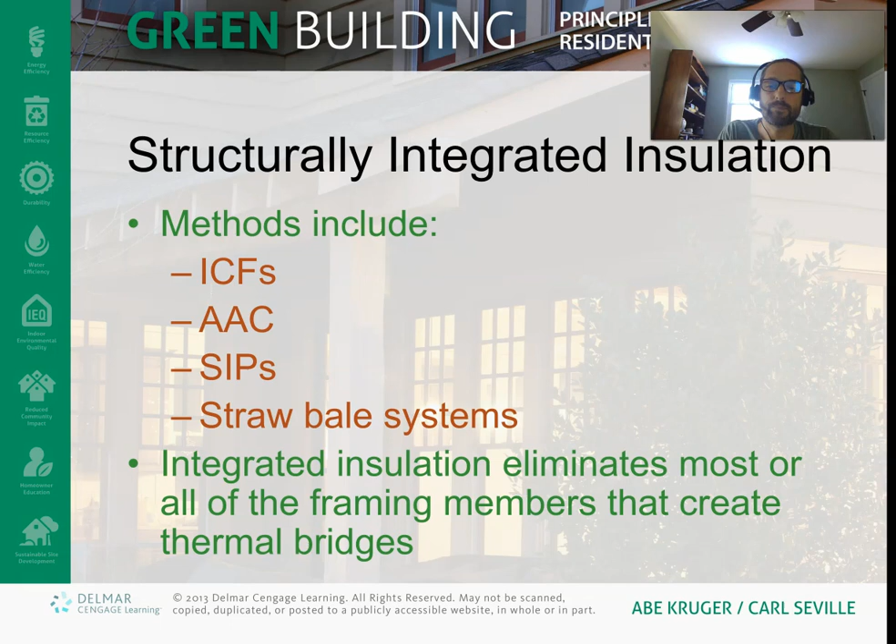And again, we've talked about structurally integrated insulation a few times, like ICFs and SIPs. This is great because it totally eliminates thermal bridging, and it's also structural.

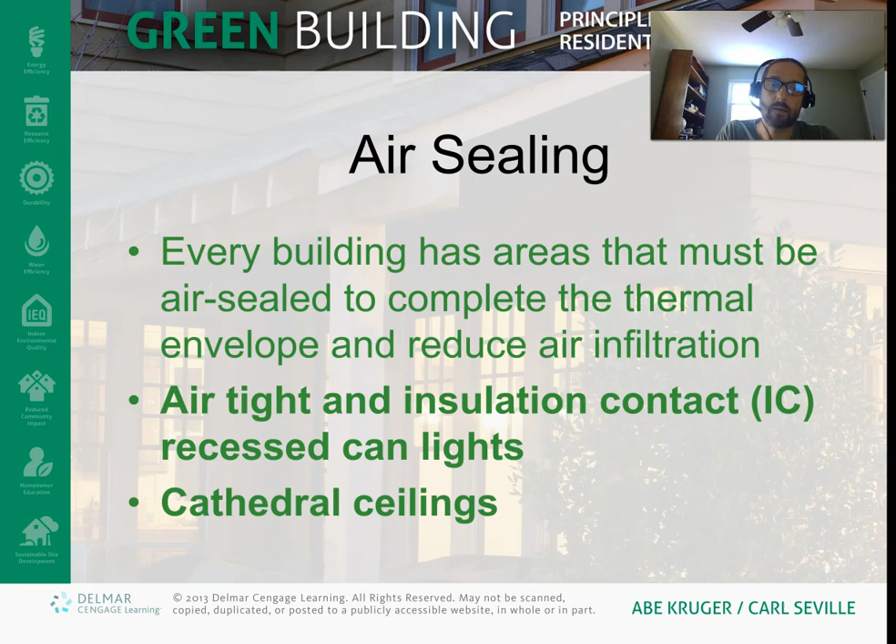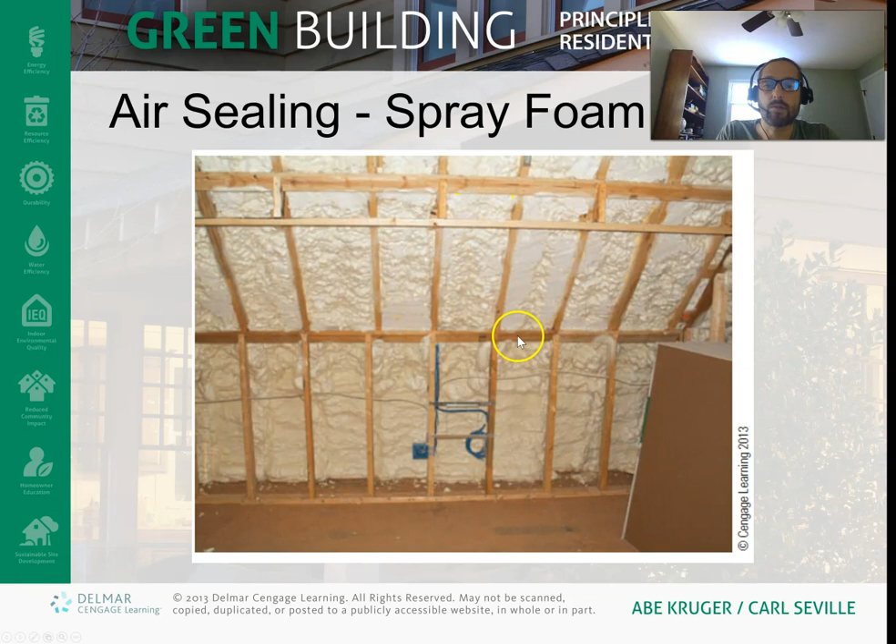Air sealing is really important. In all areas, you should minimize the airflow between the unconditioned and conditioned space. I go over some of these principles in this week's lesson as well. A good way to do that in a finished attic is with spray foam, because that provides good air sealing and insulation.

The thermal envelope—you want a complete thermal envelope, so all the way around your conditioned space you should have a full complete layer of insulation and a full complete layer of air barrier all the way around. There are some challenges in different types of buildings, like over garages and things like bay windows and dormers and so forth.

Okay, so I'm actually going to stop it there. Hopefully that gives you some sense of the content from this week's chapter.